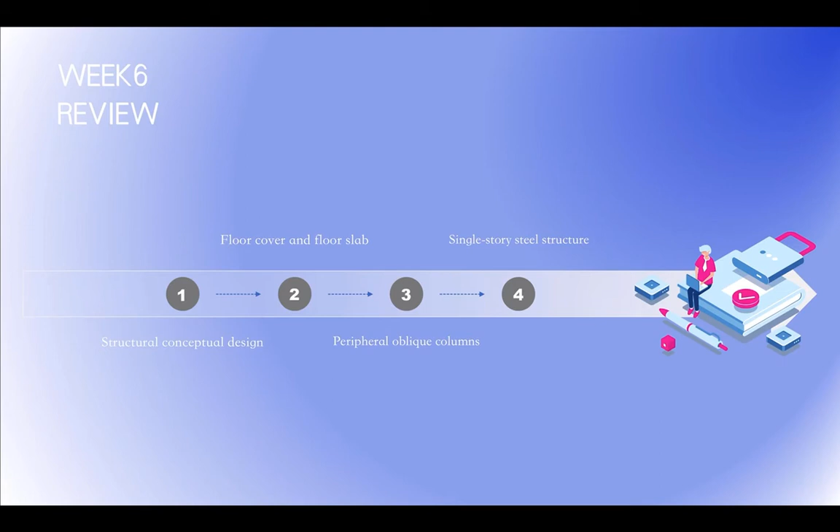First, let's review what we published last week. Last week, we introduced the structure of Beijing SOHO Center. Next is the list of contents this week. This week, we will introduce the conjoined structure design of SOHO Center.

Topics include: 1. Difficulty in the design of the conjoining structure. 2. Comparison and selection of the connection scheme between the bridge and the main body. 3. The bridge scheme. 4. Design method. 5. Summary. 6. Study plans. First, difficulty in design of a conjoining structure.

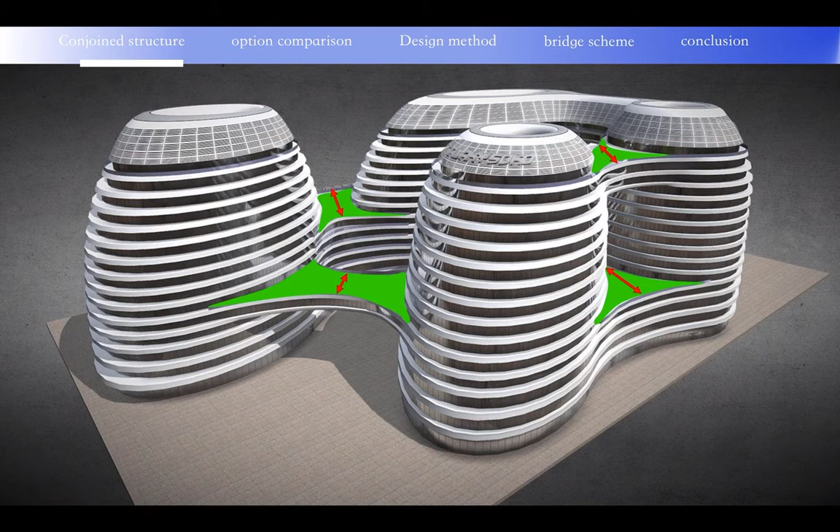There are 4 connecting bridges in the project, each spanning about 40 meters. The design of the connected bridge structure is one of the difficulties of the project compared with the general double tower conjoined structure.

The difficulties are found in the following 3 aspects. First, the width of the bridges between towers is quite different. The number of bridges is different. The height of the bridge relative to the main body and the way of connection with the main body are different, so different treatment methods need to be adopted.

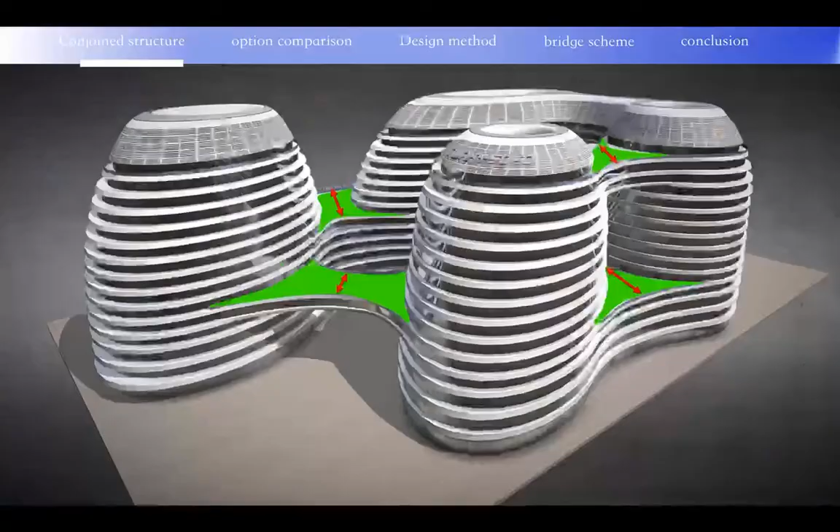Second, the outer contour of the 4 towers and the connecting bridges are all curved rather than conventional linear, so the outer contour of the floor at the connected bridge will vary greatly, making the position of the truss difficult to place.

Third, due to the requirement of the building's flat elevation, the connected bridge can only adopt the hollow truss structure, which requires high rigidity of the truss.

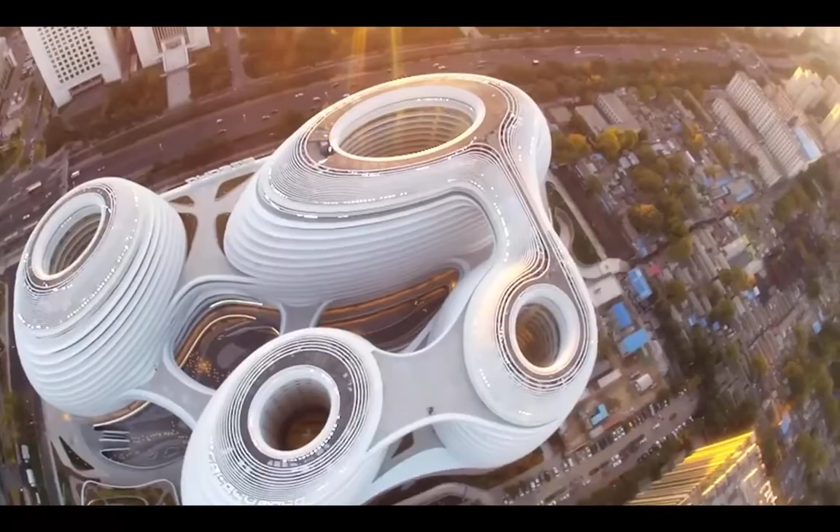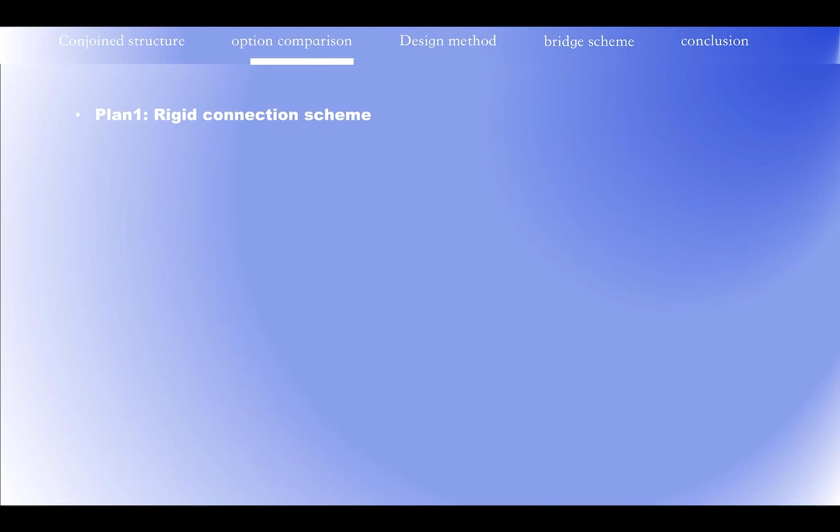2. Comparison and selection of the connection scheme between the bridge and the main body. Scheme 1 is the rigid connection scheme. The direct connection between the bridge and the main structure does not require bearings, but the mutual influence between the bridge and the main body is large, which will have a certain impact on the architectural layout.

When the span of the bridge is large, the structure connecting the bridge and the main body has to bear a large bending moment. Measures are usually taken to ensure the transmission of internal forces, such as adding diagonal supports between 2 adjacent structures, which will affect the layout of the building.

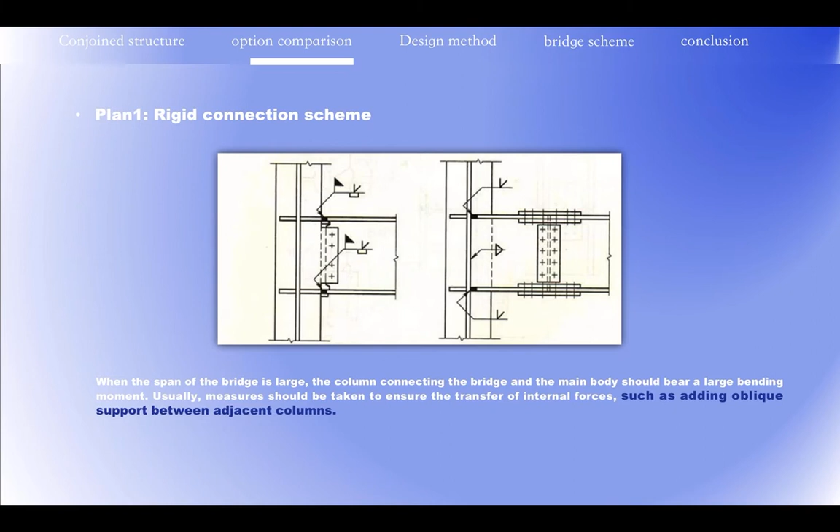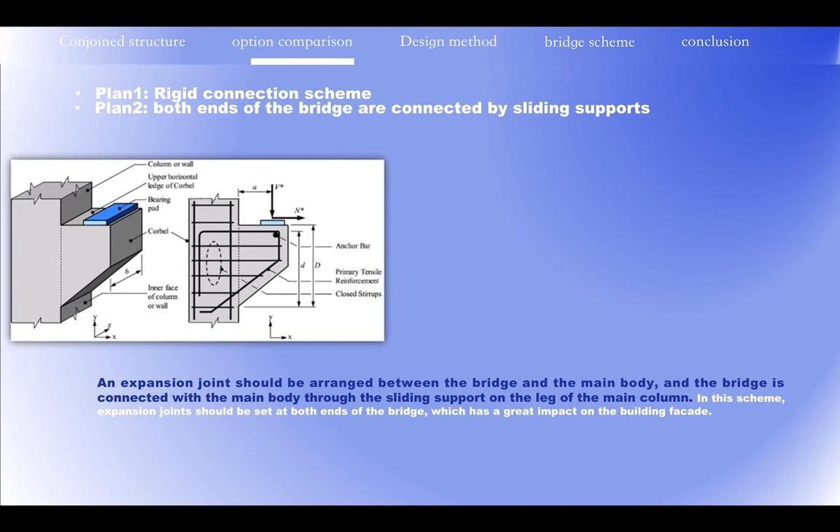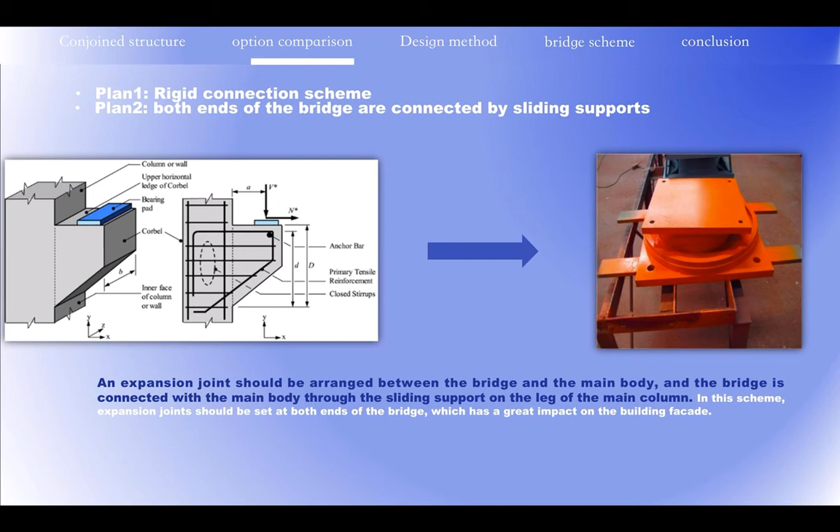Scheme 2: both ends of the bridge are connected by sliding bearing. An expansion joint should be arranged between the connecting bridge and the main body, and the connected bridge is connected with the main body through a sliding support provided on the main structure. This plan requires expansion joints at both ends of the bridge, which has a great impact on the building facade.

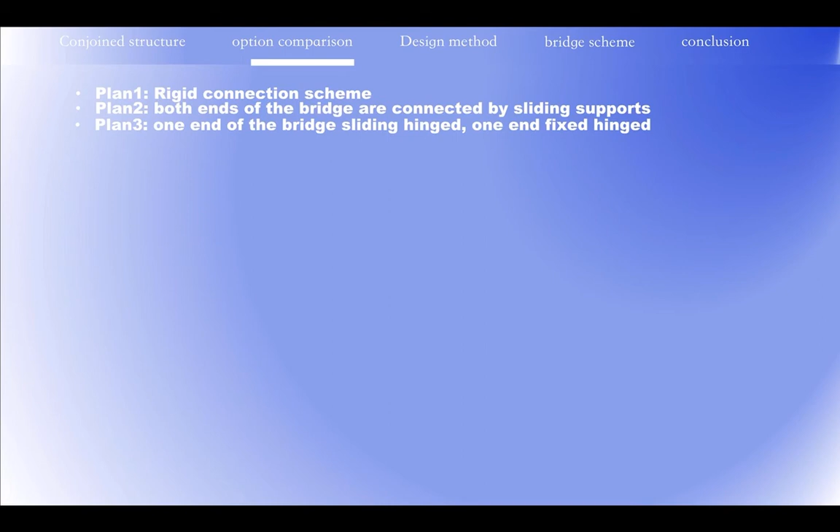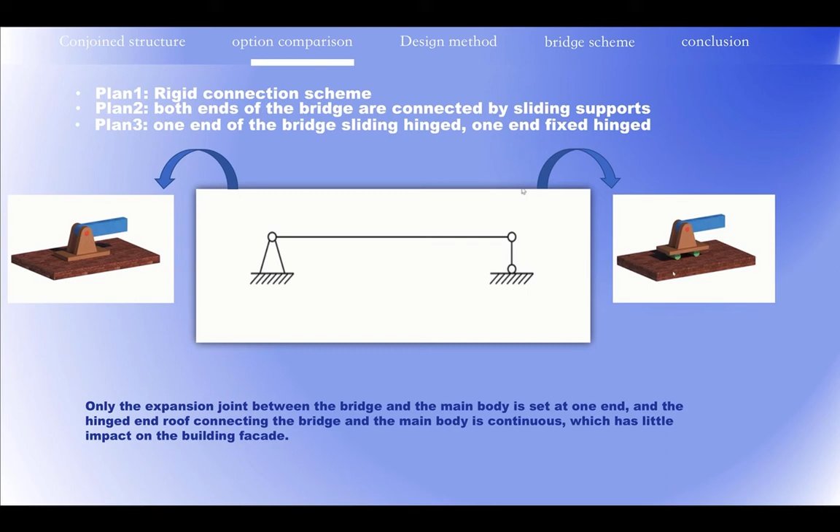Solution 3: one end of the bridge is sliding and hinged, and one end is fixed and hinged. Only an expansion joint at one end between the connecting bridge and the main body needs to be set, and the hinge and top plate connection is continuous, which has little influence on the building facade.

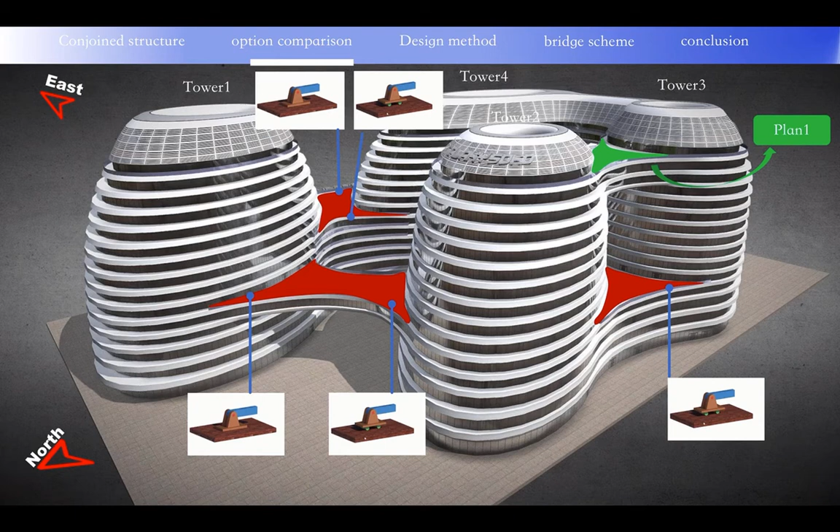According to the specific conditions, Tower 2 and 3 are 2 tower calculation units, and the high-level bridge between the 2 towers adopts the rigid connection scheme. The other 4 bridges are located between the 2 computing units, using a fixed hinge at the end close to the east unit and a sliding hinge connection at the end close to the west unit.

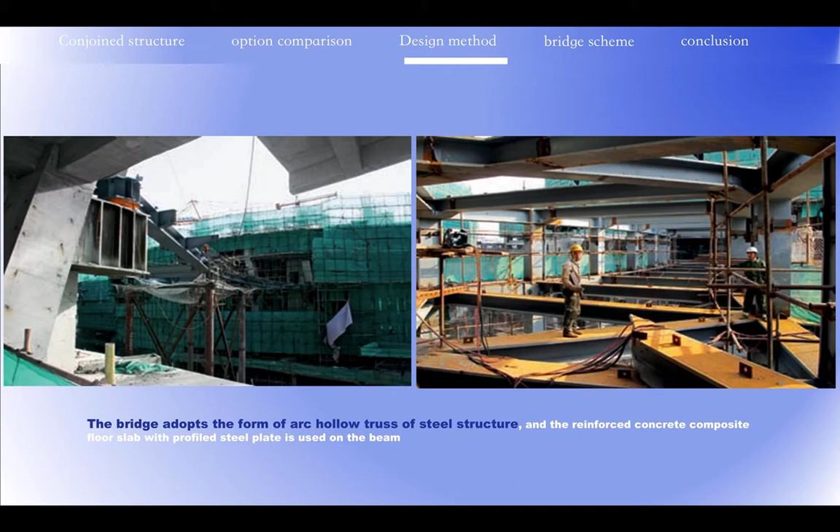3. Bridge plan. The connected bridge adopts a steel structure with hollow truss form, and uses a reinforced concrete composite floor with a profile steel plate. For bridges with small width, a single truss bridge skeleton is adopted.

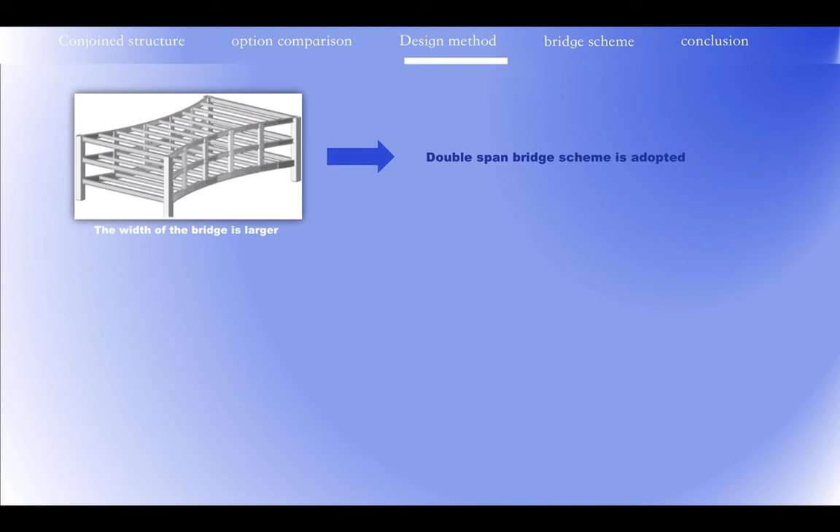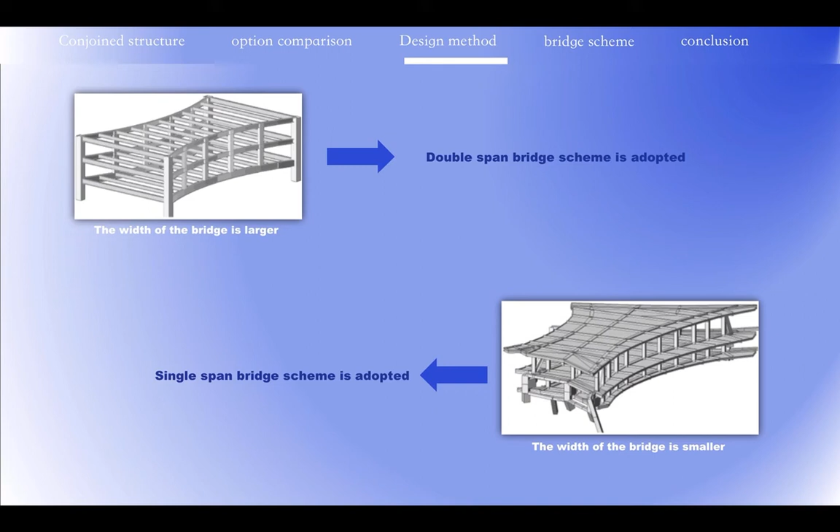The connected bridge is composed of arc-shaped hollow chassis on both sides, connected by closed beams. The core of the hollow chassis adopts H-steel beams. For large bridge width, a double truss bridge skeleton is adopted, composed of 3 hollow truss chassis connected by beams.

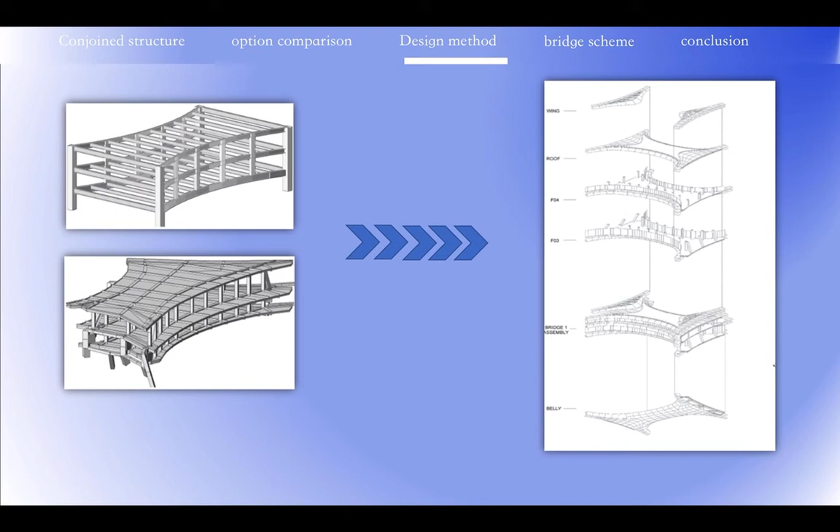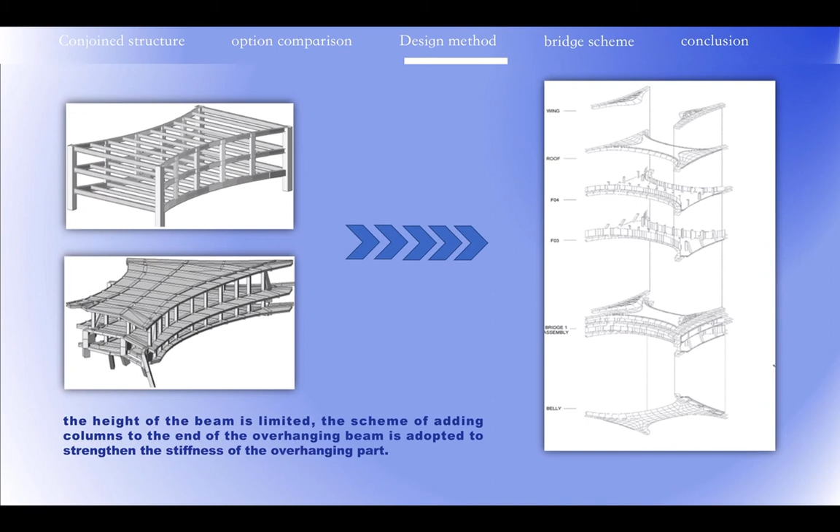For plates where the middle layer is much wider than the lower layer, to use the limited beam height, the plate with added columns at the end of the outer closed beam is adopted to increase the rigidity of the overhanging part. The calculation software adopts SATWE and midas.

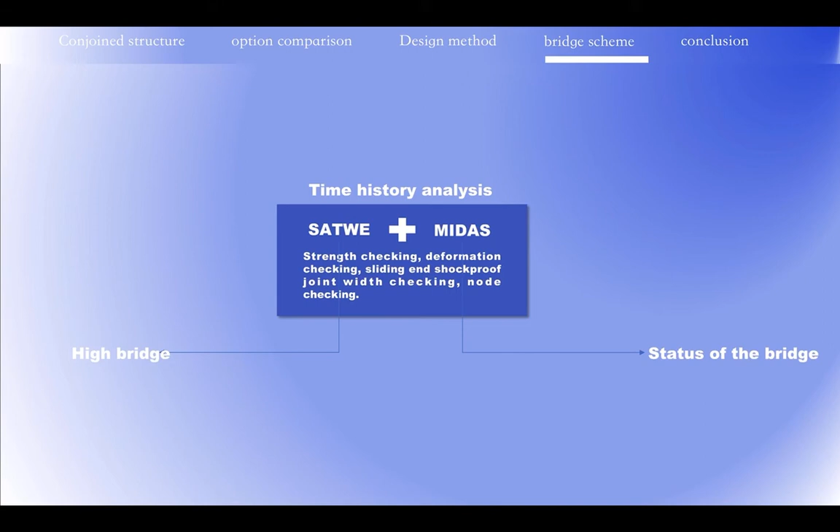The main points of the bridge calculation are the strength calculation, the deformation check calculation, the check calculation of seismic joint width at the sliding end, and the joint check calculation. The calculation method adopts the time history analysis method. The calculation of joint width of a bridge is more complex.

The main calculation goes as follows. Sliding displacement of the high-level bridge between towers 3 and 4 is the largest, and the max displacement calculation involves the input of 3 sets of seismic waves. The waveform in the figure represents the end node and the main body in directions X and Y, with displacement time of the node and corresponding position.

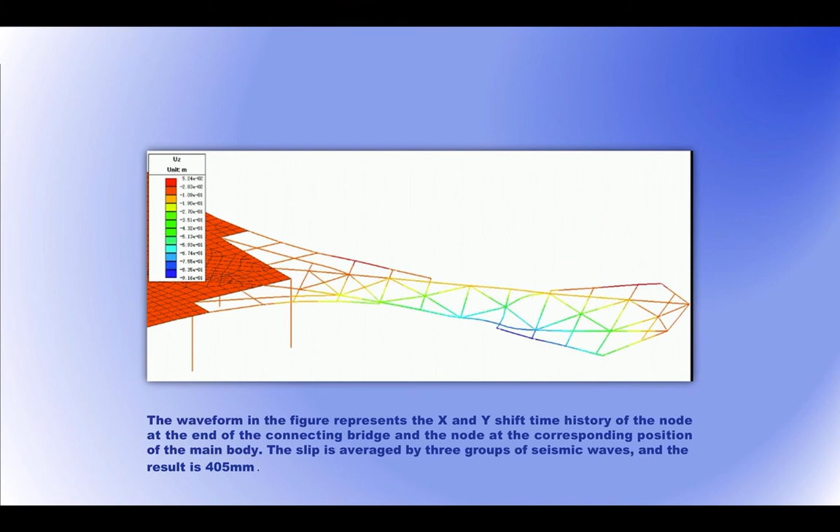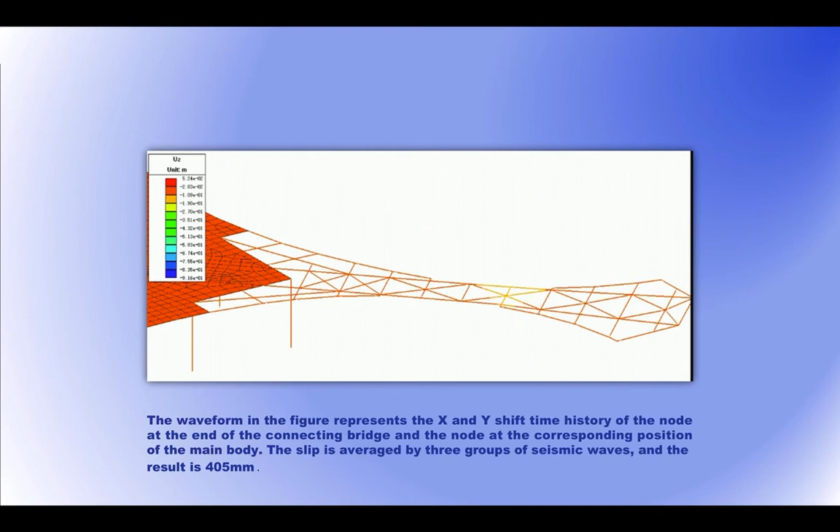5. Summary. The high-level bridges between the towers are composed of steel beams and steel columns. Due to the long span of the bridge, there is no other support in the high air. Only a steel structure can withstand the bending under long span conditions, and the design can meet the constraints of economy and technology.

The design of the bridge takes into account the large movement of the concrete structure due to temperature expansion and contraction, earthquake, wind, and other natural factors.

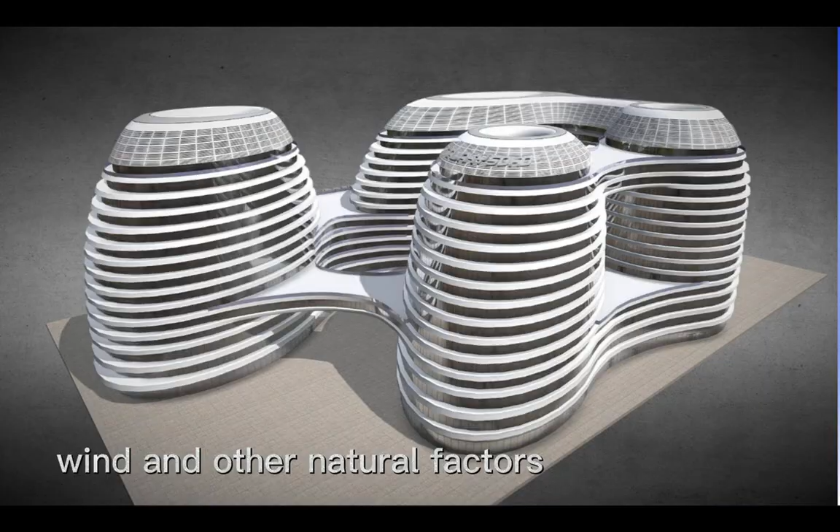Therefore, the two ends of the bridge are supported by the corbels of the main columns. The corbel on one side of the bridge is supported in a fixed manner, while the corbel on the other side provides sliding support, to avoid damage to the structure and allow lateral movement without conflict.

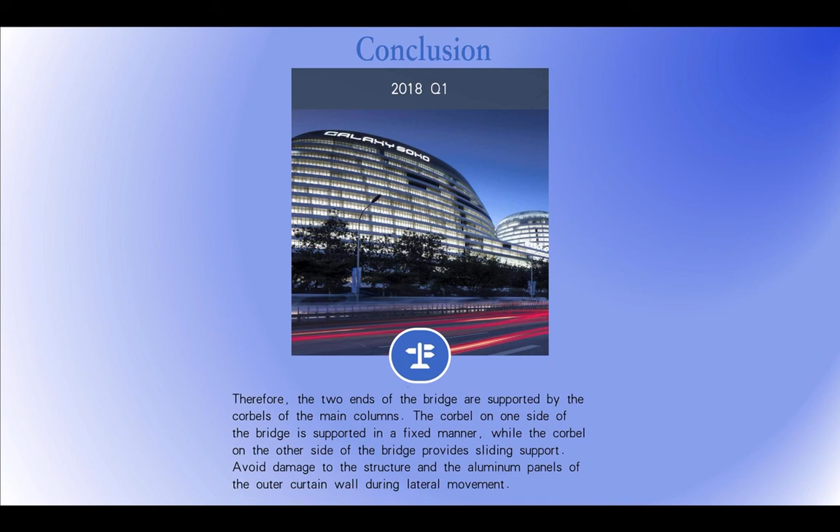In the future, we will introduce the construction process, construction difficulties, and green building aspects.